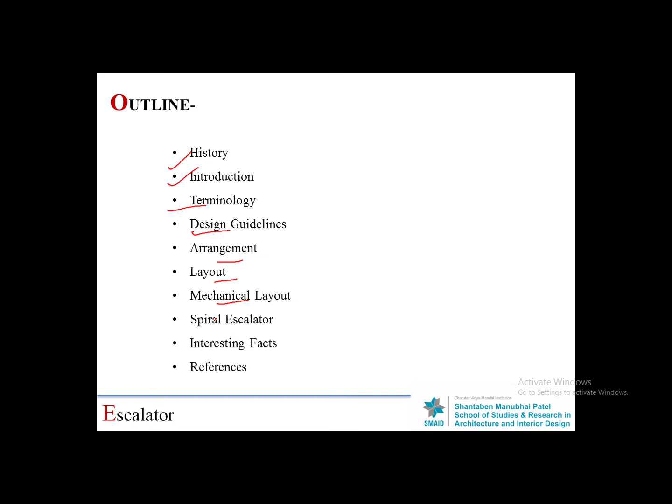So we go to the next slide. My presentation is divided in these outlines. Some basic history, then a little bit of introduction, then a little terminology relevant to their parts and other things. Then design guidelines, which are important for architects, then arrangement style, then layout, then some mechanical drawing. Then the modern revolution for the escalator system, then some interesting facts, and after that my references.

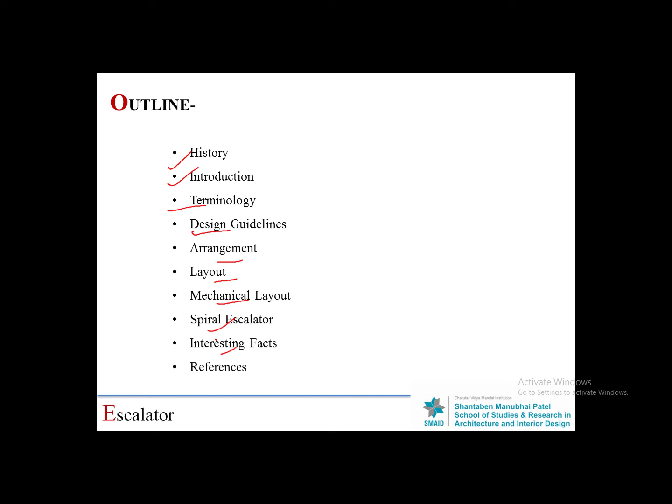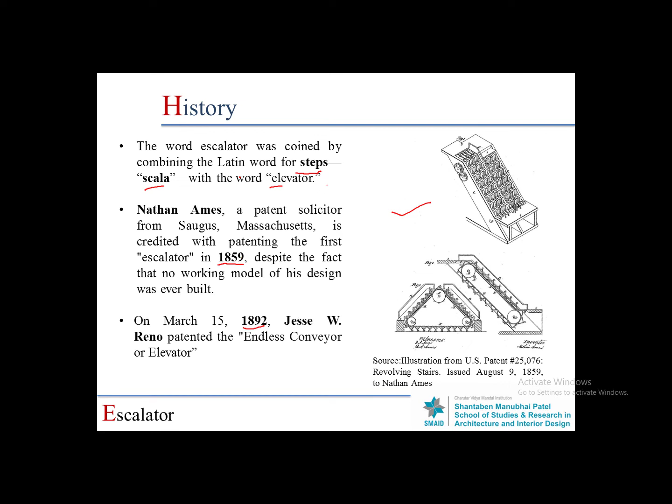So the word meaning steps is scala. When mixed with elevator, the pronunciation becomes escalator, so the word escalator comes from here. Then after Nathan Ames, in 1892 Jesse W. Reno patented the endless conveyor or elevator. This is actually the working model by Reno and Otis. It was installed in Coney Island, New York in 1896.

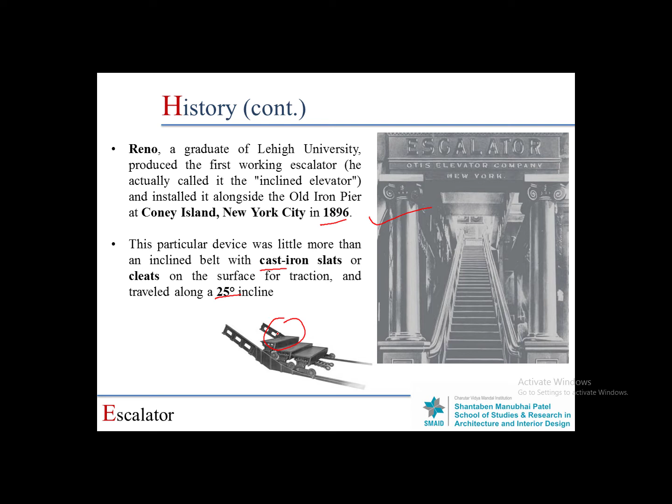The particular device is little more than an inclined belt with cast iron slats or cleats on the surface for traction, and it traveled along a 25 degree angle like this. Okay, so we go to the next slide. So the topic starts here. Why do we use escalators? Firstly, I'll tell you the basic difference between elevator and escalator.

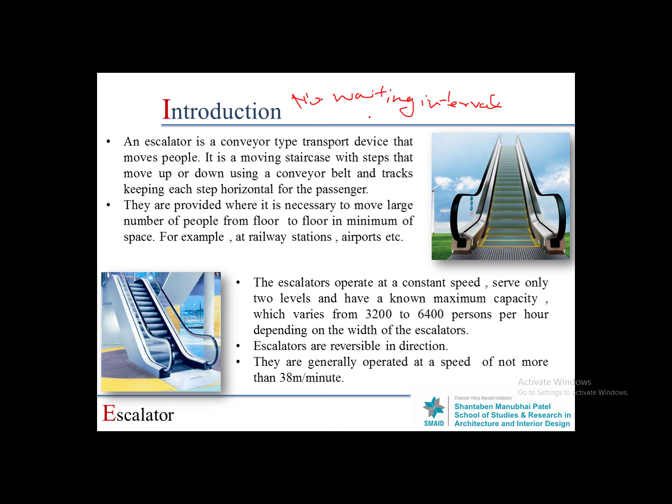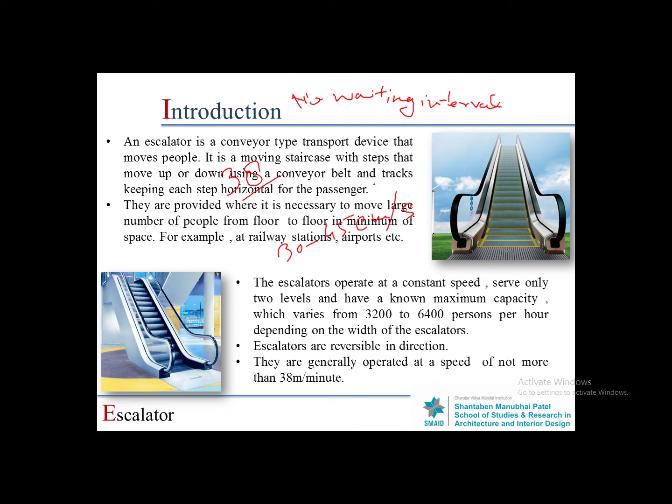So it comes to 30 to 45 centimeters, or we say 300 to 450 millimeters per second. Because if the speed of the escalator is maximum, like 1 meter per second, no one can travel actually. So that's why the speeds are less, and it is used for managing traffic continuously.

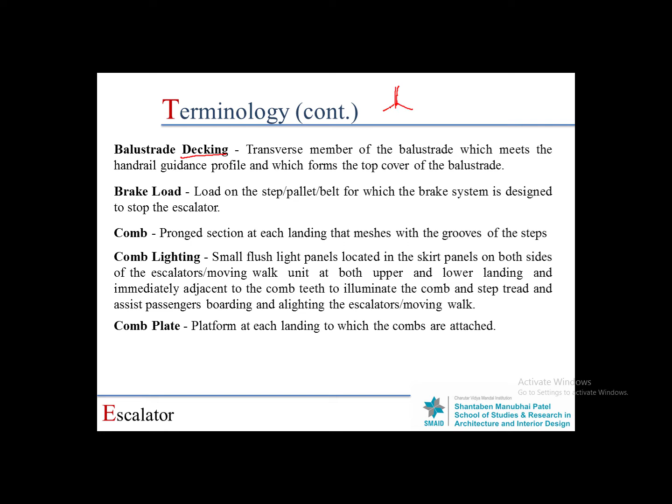Brake load: the load on the step belt for which the brake system is designed to stop the escalator.

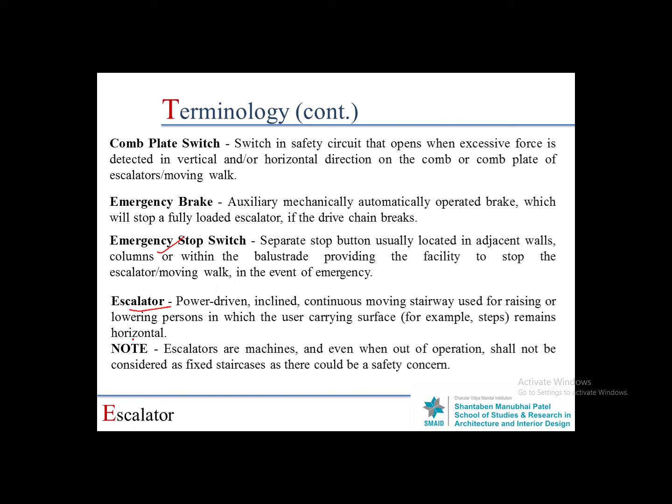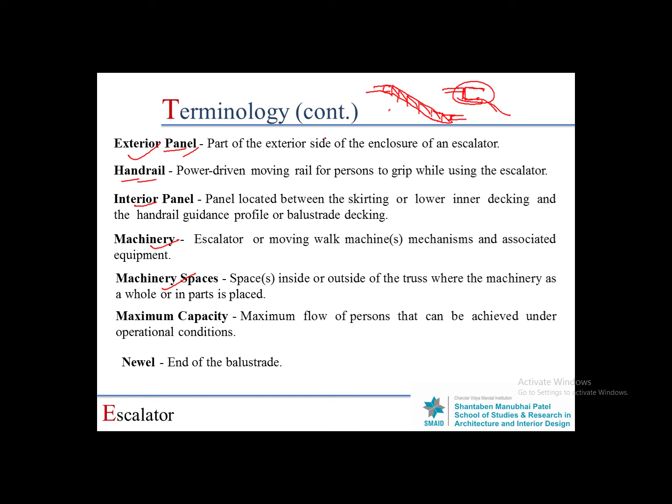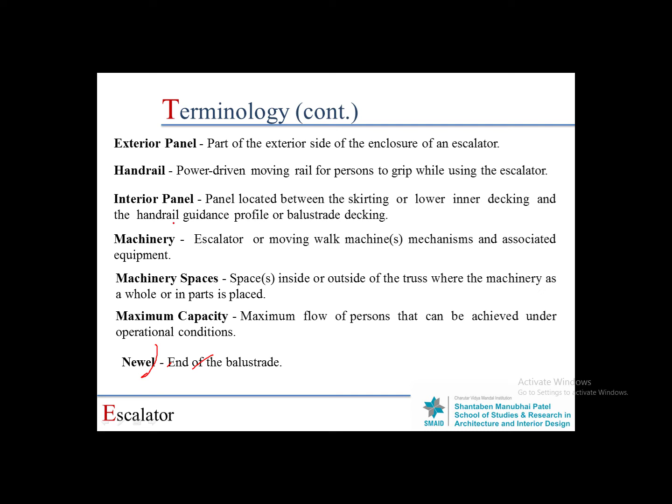This portion is used for machinery spaces. Newel, at the end of newel is the end of balustrade. We know it's a very simple term used in staircases also. We discuss some other terms of escalator.

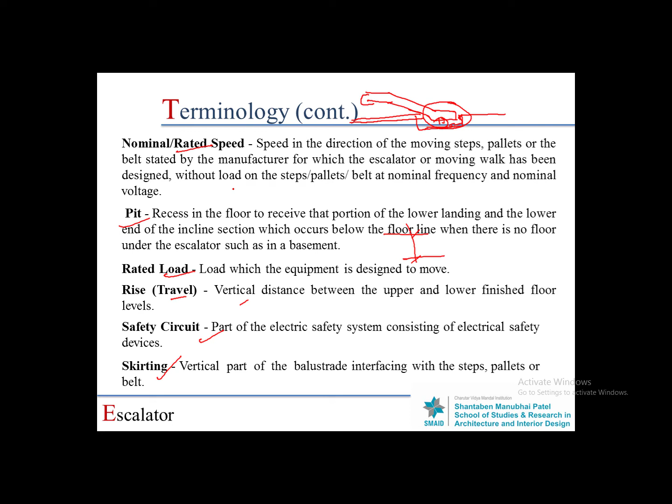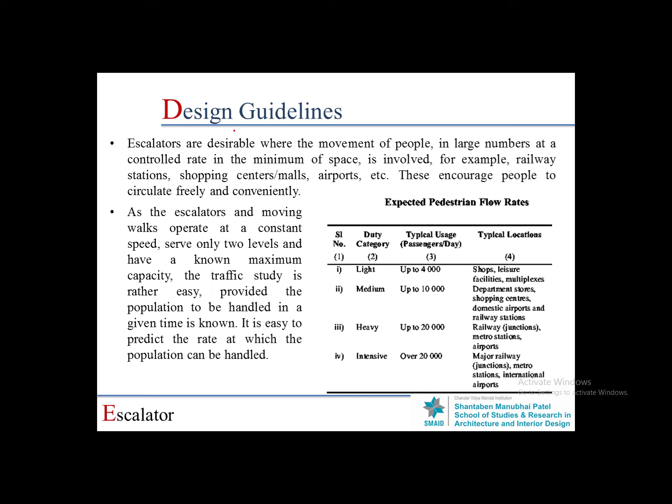Okay, this section is very important for architects. How? I told you. Escalator. If you see, this table is from NBC.

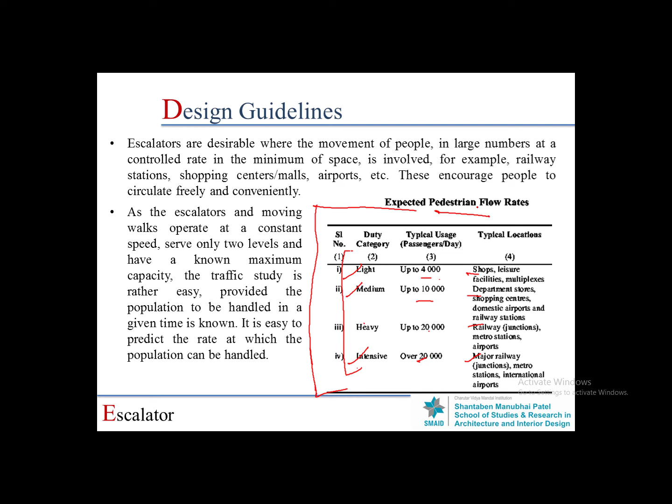On the basis of the pedestrian flow rate. So for architects this table is very useful. Okay.

Okay. This one is the project flow for selecting the criteria of the escalator, from start to project finish. So for selecting an escalator, first start, then after that the type and location of the building, then the floor height; these data we needed. Then expected population, एक कि हमें कितने population को serve करना है.

Then after that set the target parameters as per the code and the relevant IS codes, handling capacity and other things. Then after that whether it's indoor or outdoor, or maybe duty time. Then after that choosing the appropriate escalator or moving walk type from, चूँकि मार्केट में बहुत सारी कंपनीज हैं अवेलेबल हैं, तो उनमें से हम भी चूज़ इट एनी वन.

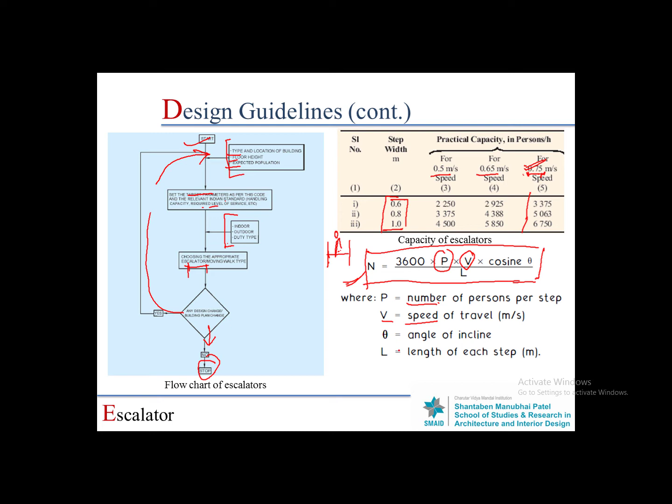Okay, this one is the formula for capacity of escalator. This formula is also useful for your GATE study, GATE preparation. In this formula, P is the number of persons per step, like 1, 1.5, like that. Speed of travel, V, depicts velocity. L is the length of each step, like 0.6, 0.8 and 1.0.

Then we put this formula, and theta we know is 30 or maybe 35. Then when we put all the values, we get this value.

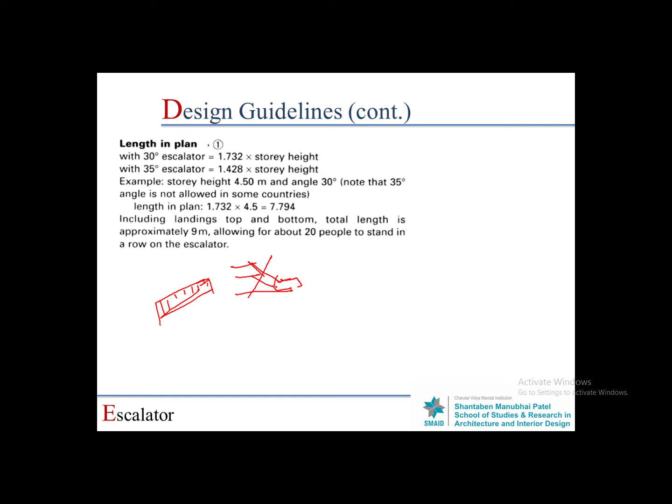It's not right, it's totally wrong. Then this one is also totally wrong. Okay, so it's very basic trigonometry for 30 degree and 35 degree: 1.732 into story height and 1.428. Actually this value comes from trigonometry, sin theta, cos theta, tan theta formulas. So for example, story height is 4.5 meter, then angle is 30 degree.

I already told you, note that 35 degree angle is not allowed in some countries, but in India it is acceptable. Length in plan 1.732 into 4.5, so 7.794. But the scenario is different. Like when we go from one floor to another, obviously in the length of plan we need 7 meter, like this one is 7 meter from here to this floor.

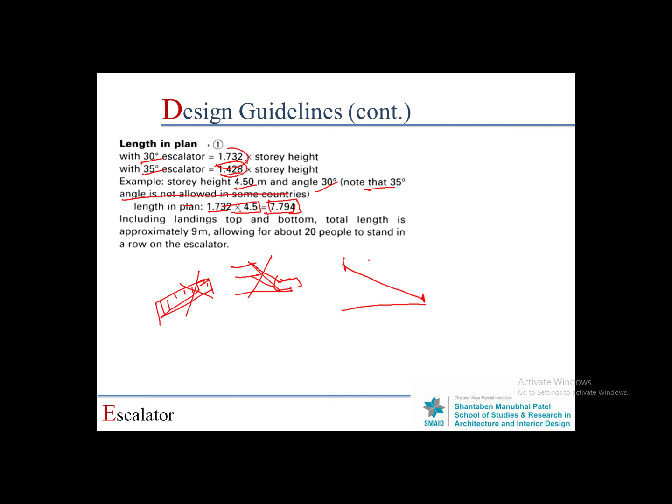But for movement and for landing, just check it, total approximately 9 meter, sorry, oops, it's 9 meter.

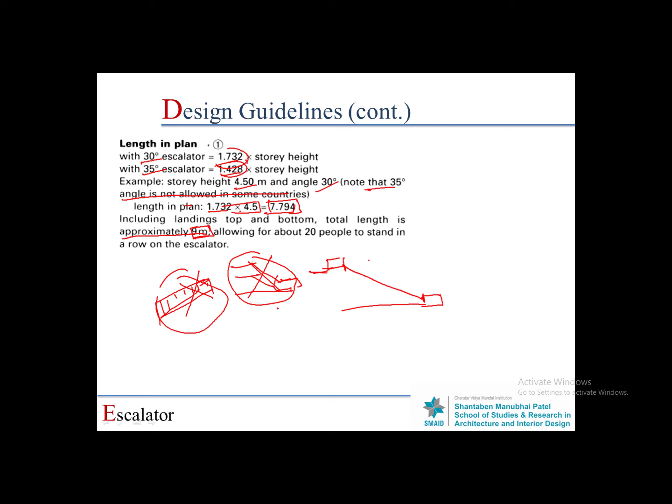Okay, we talk about arrangement systems. Yeah, of course it depends upon project capacity and also project budget. The first one is escalator.

First one type of arrangement is a single. If our project is like a simple departmental store, for proper movement but traffic is a little bit high, we use an escalator in a single way from one side, maybe up direction or maybe down direction.

Then another one is a scissor type. We saw this type in a mall. From one side it goes up and then it goes from this side, depending upon design. So somewhere in the plan this type of escalator is placed for coming from towards downside. And the third one is parallel.

Parallel means one is from upward side and one is from downward side. We saw this in so many videos, even in this crisscross type system, this side goes from traffic downward and this side traffic goes upward.

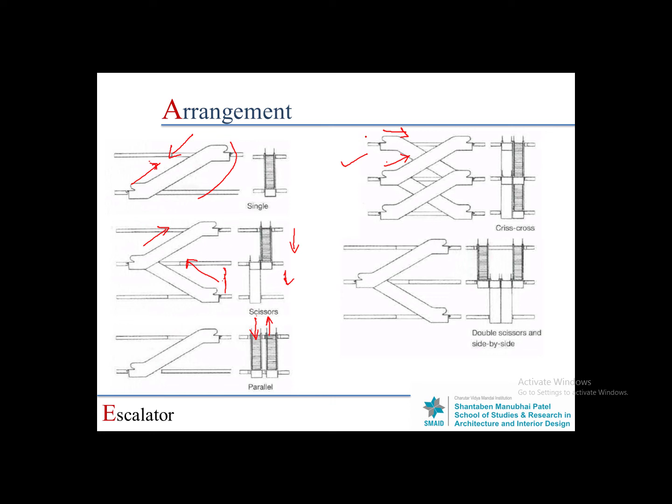This one is a double scissor. We know, we saw this type of system, it depends upon the atrium. This side comes from downwards, this side comes from upwards, and same, one from downwards and upward.

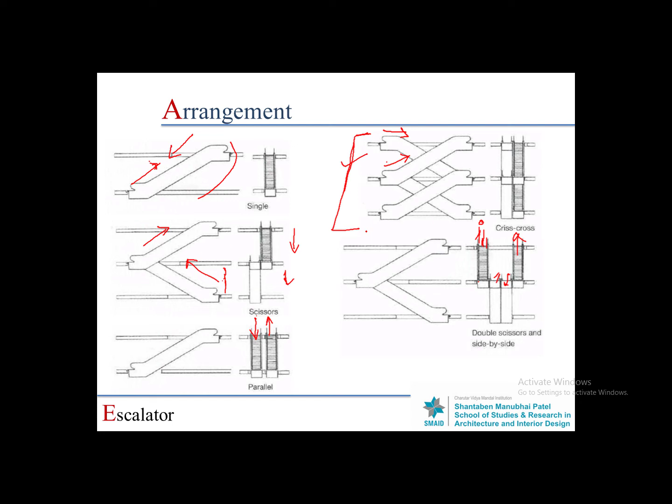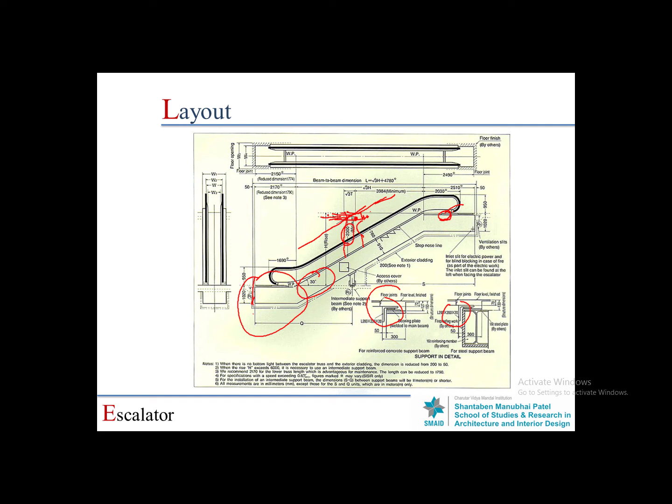This one is the angle of inclination. There are some dimensions here, but for architects it's just very basic. Don't go too much into detailing. Let's go to the next slide.

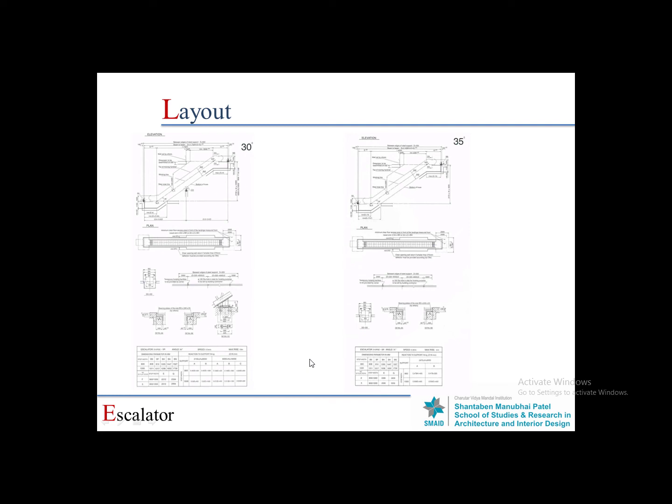This also is a very simple way. Actually it's a high resolution image, so table and drawings and details at a 30-degree angle and a 35-degree angle. We don't go into detail here, let's go to the next.

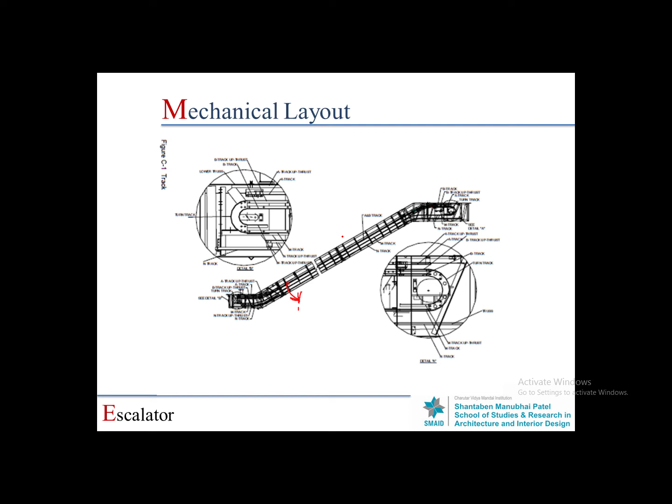Same thing. I told you this one is the complete.

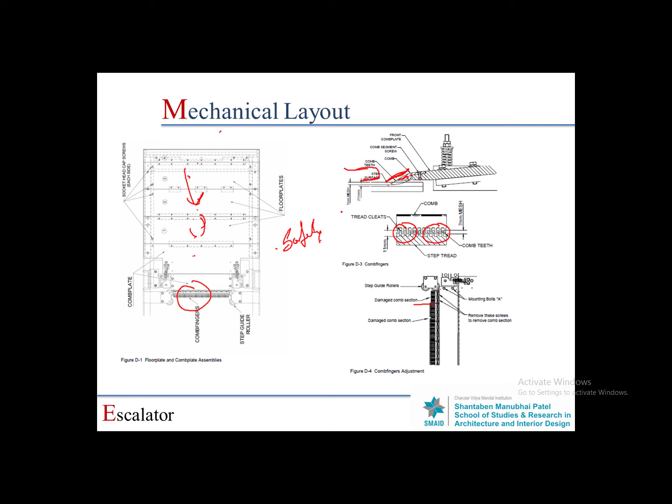They are the same figures with some enlargement. This figure is the step figure.

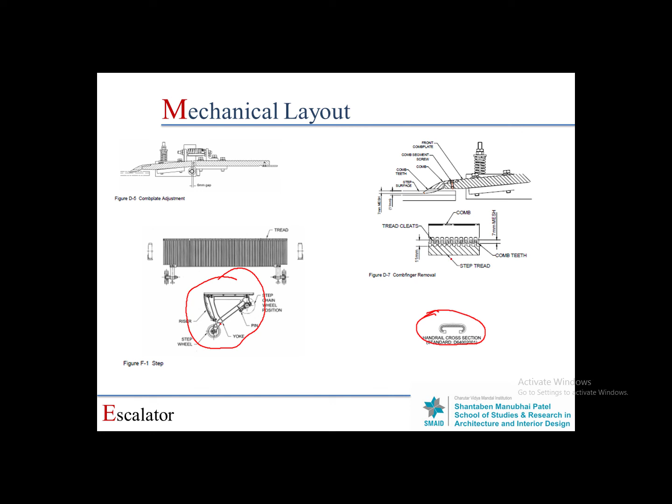This is the enlarged mechanical detail. Okay, so...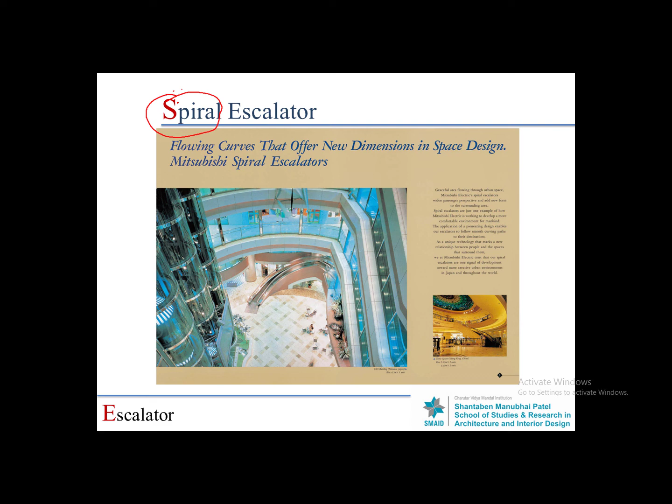So without wasting time, we'll go to the next slide. Just check, I have written the name of the project in the image from this side. For more detail you can go directly on the website.

According to the design, we placed the escalator in a very different way, so that's why they invented the spiral.

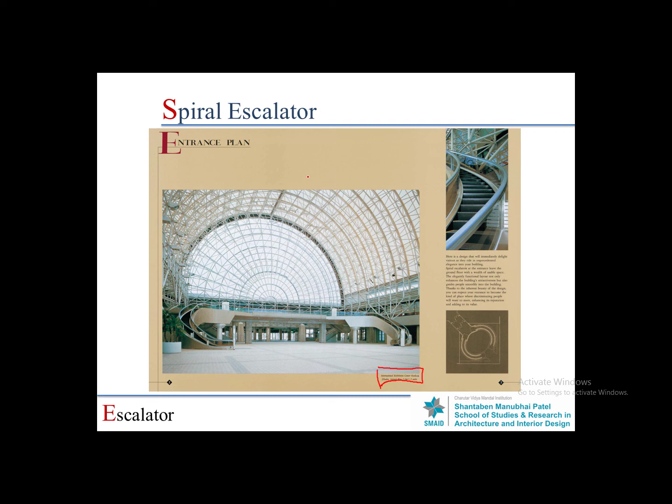It's the same. There are various projects.

These are some technical specifics and details. For our architecture students, if they want something different in escalator design, they will obviously represent it as a spiral escalator with this type of angle fixing. So these are the technical details, and it is useful for design.

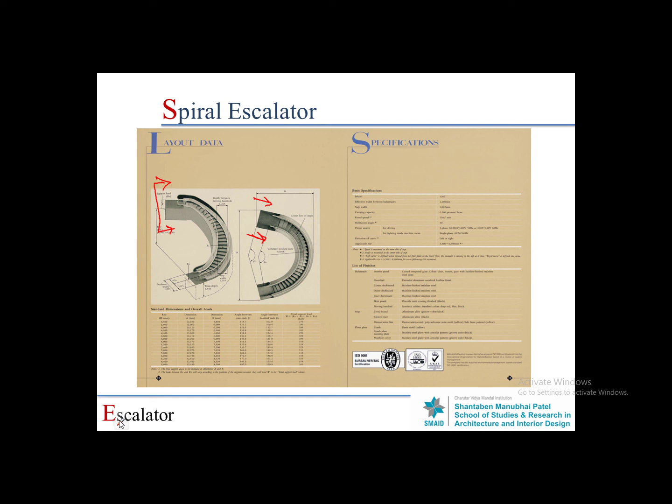The box beam construction is also patented, by collaborating with the building construction company. It is possible to eliminate the use of beam and column, as we saw in the image.

For a structurally good look, they have created a box beam style for better load distribution. Then, obviously, there's the premium finish proposal—this is for Dubai, gold coated.

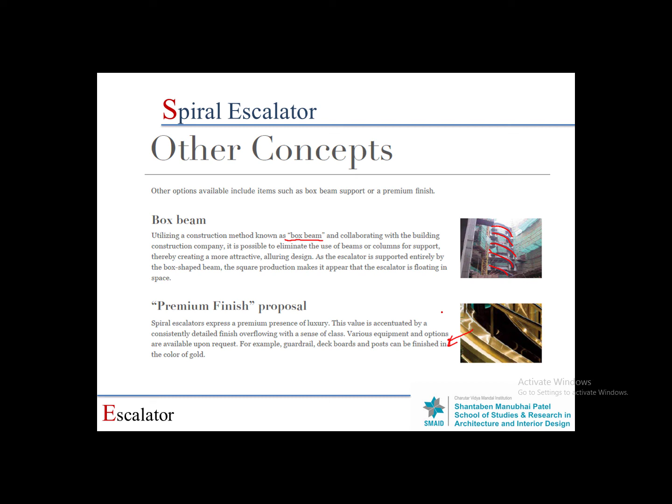Okay, so we discussed some interesting facts. At the start of the presentation, I told you the first escalator was installed in Coney Island, New York. But when we talk about India, the first elevator and escalator both were installed in Kolkata.

The reason is that before New Delhi, the capital was Kolkata. The British came and made it a capital—actually it's a very big history. They chose Kolkata as the winter capital and Darjeeling as the summer capital. Then after that they shifted the capital from Kolkata to Delhi.

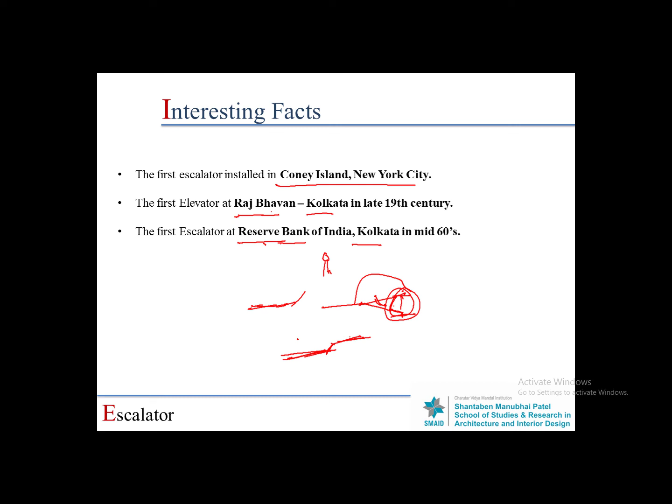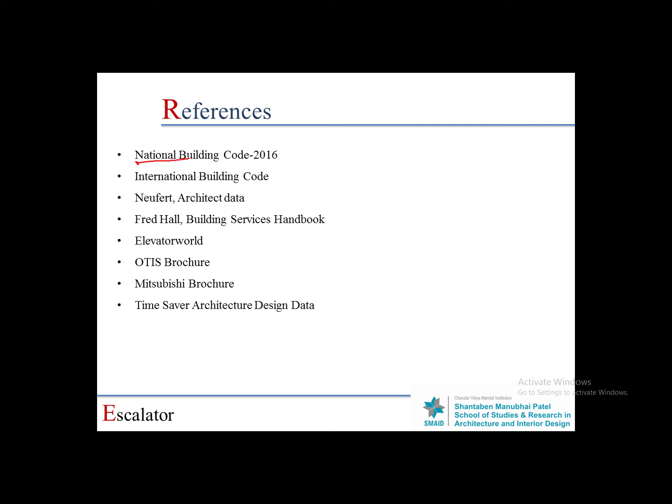I mostly prefer the National Building Code, and Otis and Mitsubishi brochures, and in some cases I have taken figures from TSS design data. And if you want more advanced information, there's the magazine of the elevator and escalator world, elevatorworld.com—you can refer from here for more advancement in the topic. And my other references are IBC, Neufert, and the Fred Hall Building Services book.